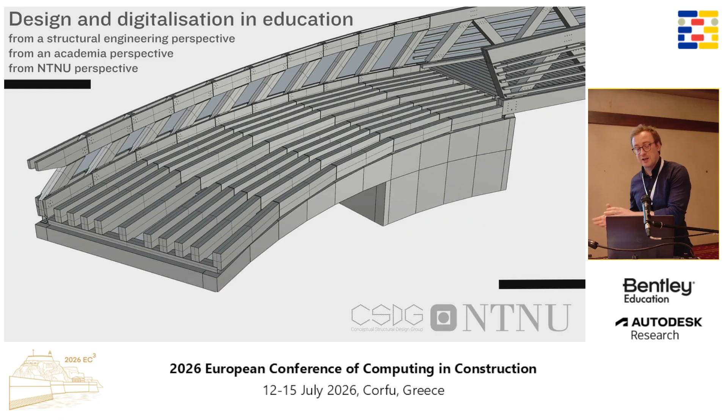And also to explain a little bit of my background, I am a structural engineer by profession. I am still working in one of the consulting companies. So I went back to academia generally because I thought that we are not training people too well. I did my PhD some years ago, and now I am teaching students at the course which we developed with the head of the department, because he, Anders Rønnquist, who is co-author of the paper, also saw that we are missing something in the puzzle.

So, just a brief explanation of what we want to achieve by introducing this course. We want to achieve a better collaboration generally in the design process, and this collaboration should be, of course, with the architects, the most creative part of the design process, not to say chaotic, which introduce a lot of randomness in the project. And we want to make the students of structural engineering a little bit more prepared for what can meet them in their real life.

Also, automation, which is coming, all of us know about it because we are at this conference. Automation and digitalization are very important factors. So we want to train the students to be aware of a little bit more creative process in the design and the automation and digitalization.

When it comes to the profile of the students coming to us, this course is dedicated to fifth year students, so ninth semester, just before they deliver the master thesis. 76% of them want to work in consulting, so it's quite strict. And I have to say that in Norway, already in the fourth year, most of them have signed a contract. So if they are saying they will be working in consulting, they probably already signed the contract with some consulting company.

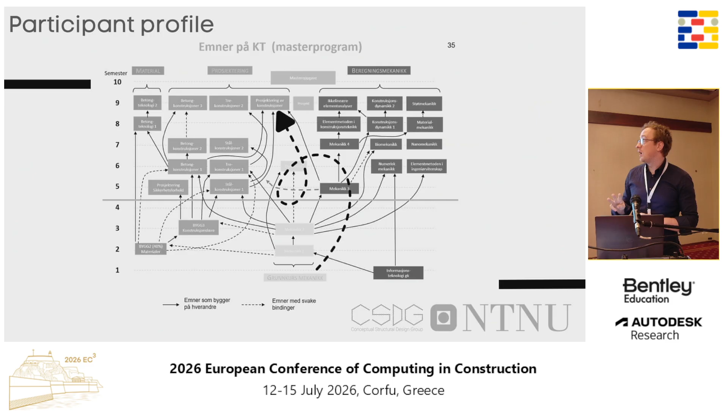My course, as you can see, is in the ninth semester. You have some mechanical courses which you have to have before, some Eurocode courses which you have to have. It's one of the free courses which you can choose, so it's not an obligatory course, but we have quite good statistics about the participants, so I will try to talk about it also later.

The course is quite simple, it's linear in the curriculum. First, we start with introducing some parametric thinking. I will explain a little bit more what it means for me, but generally we teach students how to make the models in a more classic way, linear way. Then we introduce some algorithmic design, visual coding with Dynamo. Then we go into the finite element method. We teach them how you should create the models to be able to calculate them and to analyze them.

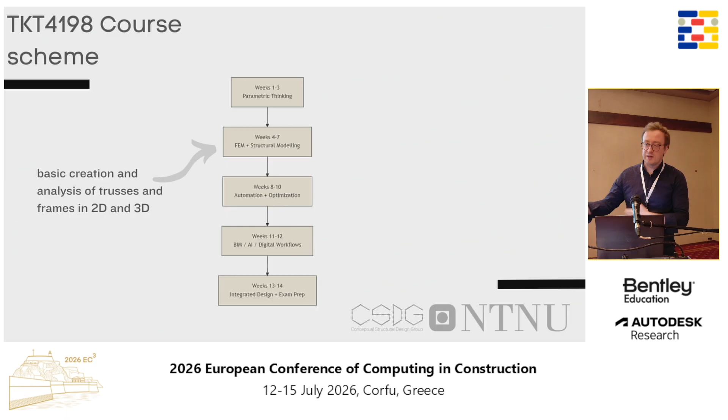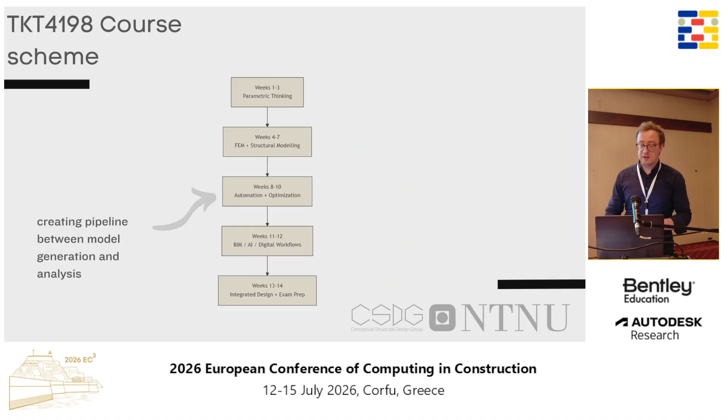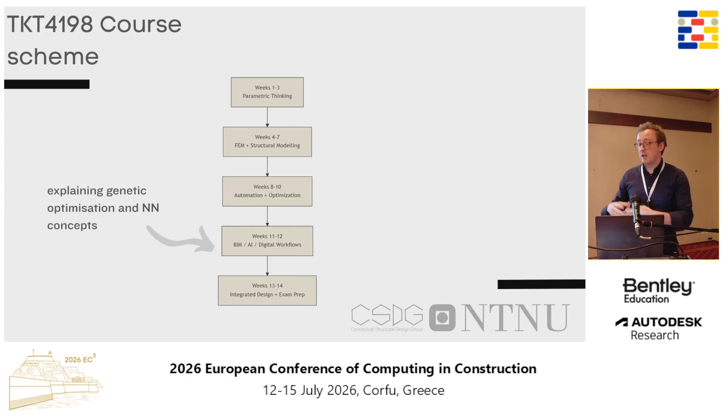So then we are mostly working with Autodesk Robot, trying to combine the parametric models, maybe not at that stage, but in the later stage when we are talking about automation and optimization, we are trying to entwine the parametric modeling with the finite element results and critical thinking about the design. Finally, we finish the course with BIM digital workflow, meaning how to create a model based on the IFC to the final results. So how to analyze the three-dimensional object from IFC, and then how to make the finite element model out of it.

As I was saying, it's not an obligatory course. So from 150 students, which are each year at our department, around half of them are taking this course. We had some drop in 2022, for many reasons. Generally, we also have a small drop in the total number of students at our department, but we hope it will go up.

And then the assignments, because when I explain the assignments, I think you will understand better what we actually want to achieve. So I'm giving them quite simple tasks, like design a truss or design the structure. I'm not giving them any templates. I'm just teaching them how to use the tool. So they have to figure out how to do it by themselves.

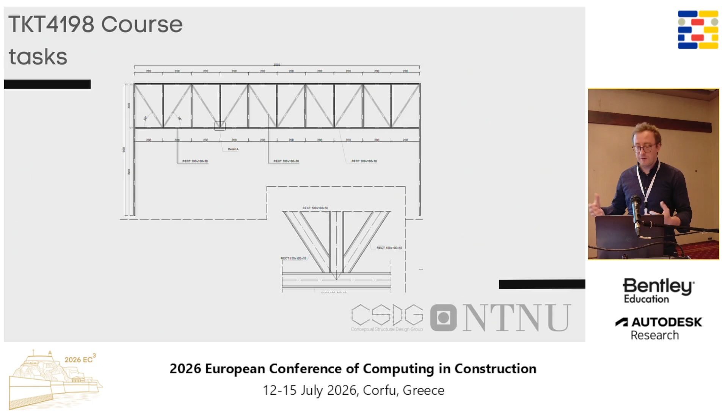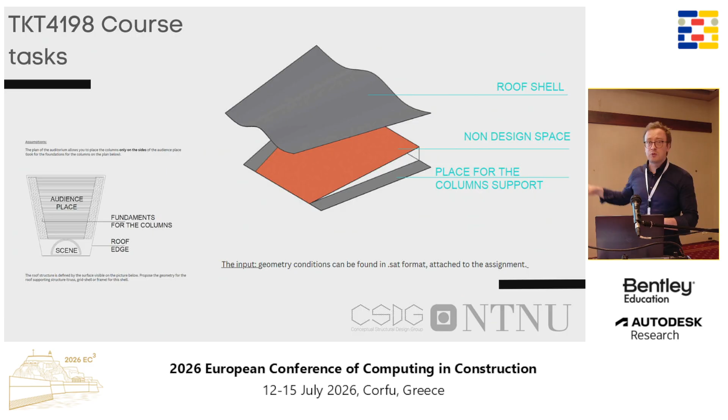Some of the tasks are simpler, some of them are more difficult, but there is never a straight answer. So for example, if they want to design something, I'm giving them some obstacles, some boundary conditions, and I'm just waiting for the response. It's quite difficult, of course, to justify the grade for the students, because some of them can be really creative. Some of them, because of how we teach until this course, which is more like calculating according to some rules, are not happy that they have to create something from scratch.

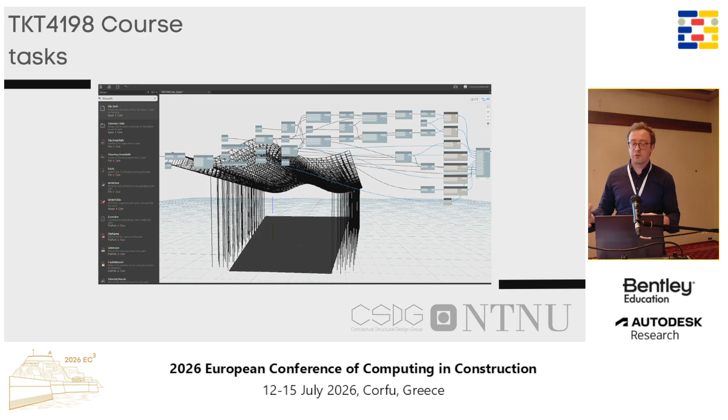Because when I'm giving such a task, like design a bridge, to architecture students, they have an enormous amount of quite bad ideas. But when you ask structural engineers to design the bridge from scratch, they are more or less like, okay, but what are the requirements? Should it be concrete, steel? And I think we are missing something in this education. So some of the tasks about optimization I am also closely connecting with real cases.

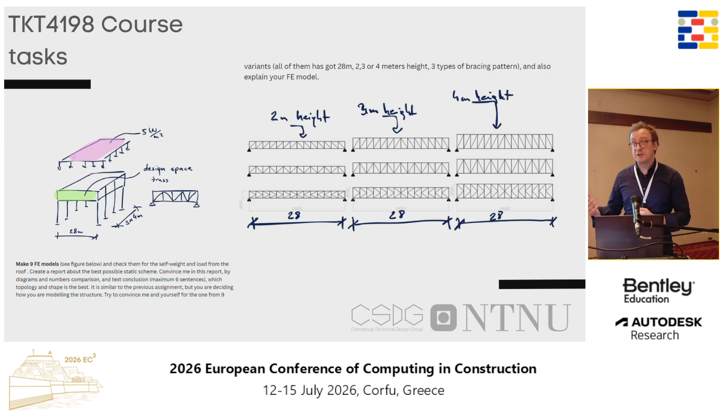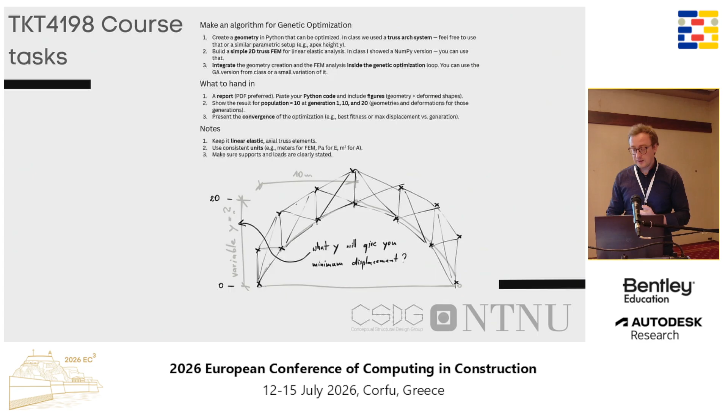So I'm waiting not only for the answer what is the minimum or the maximum, but I am also asking about the buildability and the feasibility. And in the report, they have to really justify the chosen solutions. And finally, one important thing, when I'm teaching them, I generally go quite deep into explaining how CAD systems work. So for example, I'm not only giving them the task to minimize the arch shape, but I'm also explaining how NURBS curves and surfaces work, and then based on that to propose the most optimal structure.

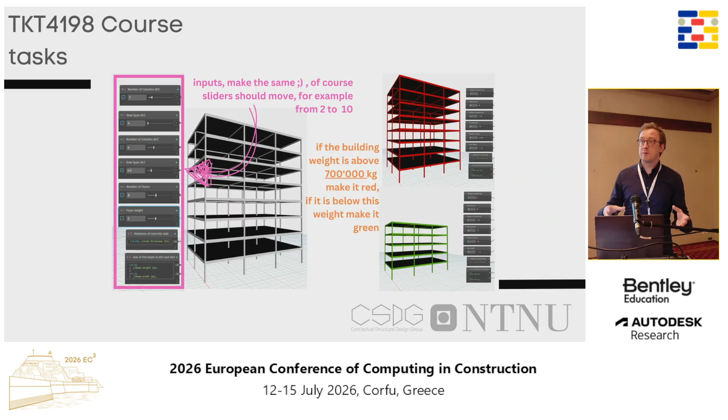Okay, the exams, because this is also quite important. The exams are for the whole 60, 70, 80 people in one hall. They have exactly the same NTNU computers, exactly the same software. For 4 hours, they are solving tasks. The tasks are quite open. I'm normally creating 4 tasks, 1 task per hour to be solved.